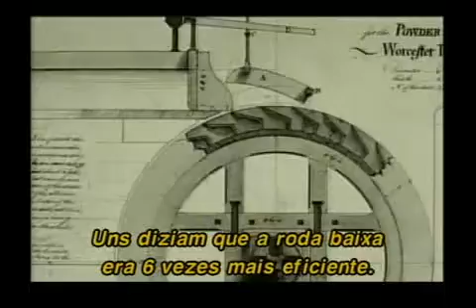In use since Roman times, the water wheel was still the main source of power, but was at the centre of an increasingly heated debate. There were two basic designs, the undershot and the overshot. Some contended that the undershot was 6 times more efficient than the overshot. Others insisted that the overshot was 10 times better.

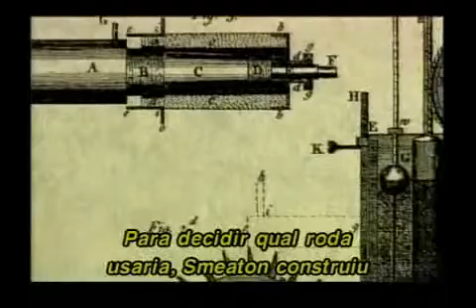In 1752, a maker of scientific instruments, John Smeaton, was foolhardy enough to try and settle the matter with science. At the age of 27, Smeaton was given a commission to build a watermill, a feat in itself since he'd never built one before. To work out which design he would use in his mill commission, Smeaton built a sophisticated wooden model. It allowed him to test how much power the undershot and the overshot wheel exerted in the same wooden frame using the same head of water.

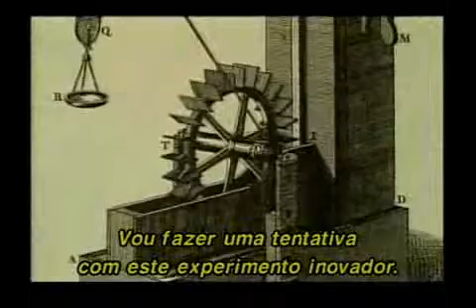I'm now going to have a go at this groundbreaking experiment. This one, of course, here's the undershot, and this is how it works. I open the reservoir, water comes out, and it gushes below the wheel, and it turns the paddles. Now, here's the overshot. Same thing, open the sluice, and the water gushes out of here, I should say, at the same rate of knots as out of that.

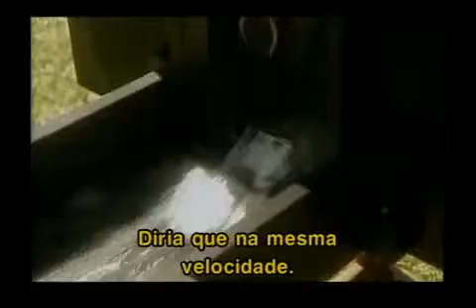The water power is the same for both wheels. What's interesting is that it's turned in different directions. So, which is the stronger? Well, we'll have a tug of war to find out. We can do this by connecting the two wheels with this rod here. And of course, the stronger wheel will prevail and will drag the weaker wheel in its direction. Let battle commence.

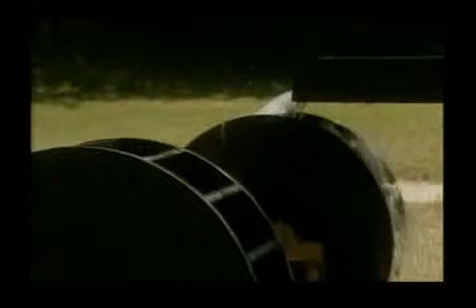The overshot is going the direction it should be going, and it's dragging the undershot with it. Quite clearly, the overshot wheel is the more powerful. There it is, the winner. Smeaton showed with his experiment that the overshot is approximately twice as efficient as the undershot. The key is gravity. The energy of the overshot is greater because it's falling from a height.

Not one to rush to hasty conclusions, Smeaton took 6 years to publish his findings. The detail of his analysis has left me a little baffled, but it amazed his peers. With his scientific test and analysis of the result, Smeaton offered a way to focus on the efficiency of machines that others could follow. Smeaton had really laid the foundations for the modern profession of civil engineering.

In the hands of another man, Richard Arkwright, the work revolution would take its next crucial step. Arkwright had a brand new machine powered by Smeaton's overshot water wheel. It was hidden away in a remote valley of the Pennines in Derbyshire, as if in a fortress. He didn't want anyone to see what he had in there. Arkwright's secret machine would transform the manufacture of a traditional cottage industry, unchanged for generations. Cotton spinning.

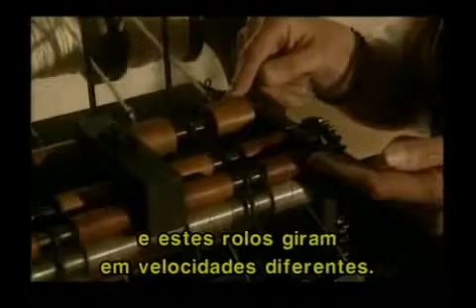Right. So we bring in this cotton at the back here, and these rollers, they're geared to go at separate speeds. The back one is going slower than the front one, and that bit that I was doing with my fingers on the great wheel is being done here. It's drafting the fibres out so that it's going thinner.

Okay, now I can actually get this in operation so we can see just what you mean. Get the wheel going, get my rhythm going. I can engage the mechanism like this, and off we go. So it's fantastic, it's all happening at once. Being drawn out, spun, and wound on. Earlier in the century, drafting rollers had been patented, but it was Arkwright's genius to realise the system and to make these drafting rollers work.

So obviously it's making more thread, more quickly, but also, as I understand it, the quality is better. In fact, it was so good and so easy to produce that Arkwright was able to think big. But imagine not just 4 bobbins loaded with thread, but 96, and powered not by hand, but by water wheel. And indeed, not just 96, but row upon row of these machines, floor upon floor. Such a dream entailed an altogether new kind of building. It was the cathedral of the Industrial Revolution, the factory.

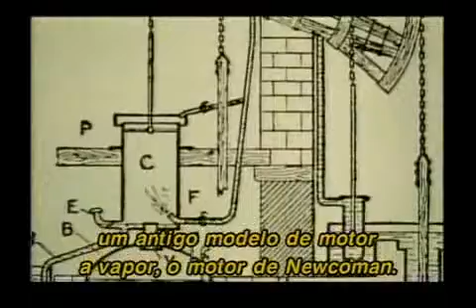James Watt grew up to be a maker of scientific instruments at Glasgow University. One day, he was asked to repair a model of an early steam engine, the Newcomen engine. The model had literally run out of steam.

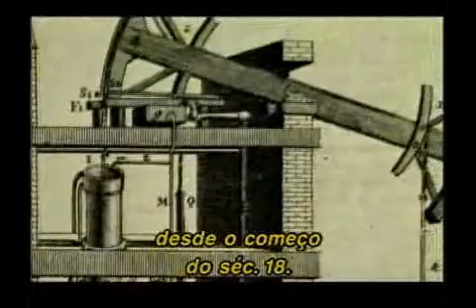The Newcomen engine had been in use since the beginning of the 18th century. It was mainly used for pumping water out of mines, but didn't work terribly well. The engine operated on the principle of a vacuum, created by condensing steam in a single cylinder. However, it consumed a huge amount of coal to produce not a lot of power.

Now, the problem with this engine is that steam had to be injected and condensed in the same cylinder. This means that for every stroke of the piston, the cylinder had to be heated and cooled, heated and cooled, heated and cooled. This made the machine very, very inefficient indeed.

Watt fixed the model, but wrestled with the problem of its inefficiency for over a year. Then he went for a walk on a Glasgow golf course. In 1765, as he walked across Glasgow Green, inspiration struck. As he was to write, I'd walked no further than the golf house before I had the whole thing arranged in my mind.

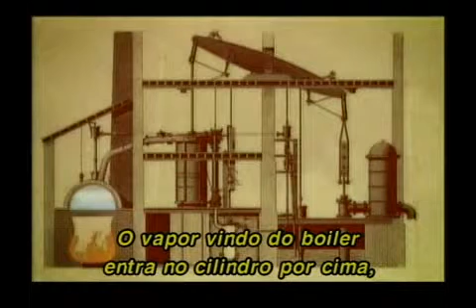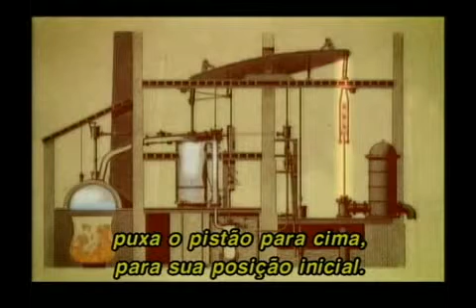Steam from the boiler enters the cylinder at the top, pushing down the piston inside. At the end of the stroke, the pressure in the cylinder is equalized, and the natural weight of the pump rod pulls the piston up towards its starting position. As it rises, a valve releases the steam into the bottom of the cylinder.

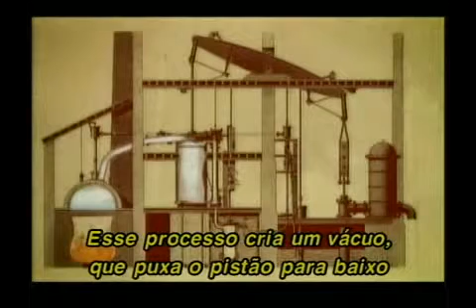On each downward stroke, this steam is drawn into the separate condenser, where it is condensed. This process creates a vacuum which pulls down the piston as the steam above pushes it down. This amazingly efficient use of steam means that the Watt engine consumes less than a third of the amount of coal used by the Newcomen engine. It's also twice as powerful.

The awesome power of this engine raised a ton of water with every stroke. That's nearly 4 million gallons a day. But Watt's engine was to become more than just an efficient super pump; it was to drive the transformation of every workplace in the country. But there was a problem.

Watt was a pessimist, a hypochondriac, prone to fits of despair, inactivity and depression. His low point came in 1773, when he concluded that there was nothing more foolish than inventing. And for once, his depression was justified, because after 8 years of toil on his steam engine, his partner went bankrupt. What he needed, of course, was a new partner, one with drive, resourcefulness, and a head for business.

Enter Matthew Boulton. Boulton was a dynamic Birmingham manufacturer who, when he met Watt, saw the designs for the steam engine and immediately realised its potential as a business venture. Boulton, with his ready cash, his craftsmen and his confidence, took on this great and new idea and he ran with it.

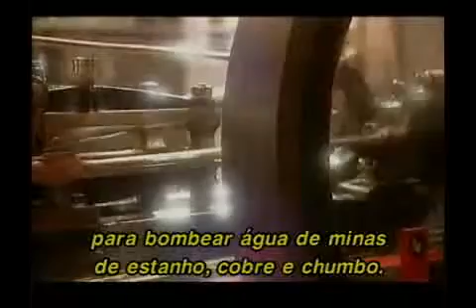Watt left Scotland and joined Boulton in Birmingham in 1774. In partnership, these two men were going to be, as you'll see, giants of the Industrial Revolution. Within 5 years, after improving their prototypes, they had captured the market in steam engines for pumping water out of tin, copper and lead mines. But Boulton had bigger ambitions.

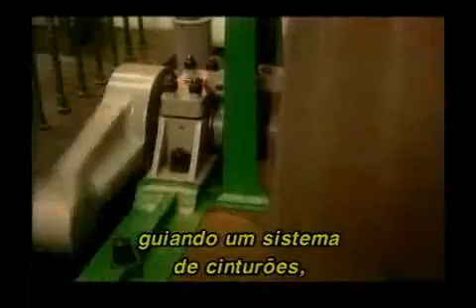Boulton realised that one small but highly significant alteration to the steam engine would make it much, much more useful. He urged Watt to devise a way of converting the up and down or reciprocating action of the engine into rotary action, so it worked rather like a super efficient, powerful and very reliable water wheel. With an arm attached to a crankshaft driving a system of belts, the steam engine could power not just one machine at a time, but a whole series of them.

Steam power was about to change work and the workplace, not just for the miner, but for the manufacturer, the iron foundry worker, the textile worker, the distiller, and even the potter. Steam was now big business, and the place it took off from was the Industrial Revolution's most happening city, Birmingham.

Even today, over 200 years after they met, you can still come across Boulton and Watt. I wonder if, when their partnership began, they realised they would create one of the first international corporate businesses, with not only factory but design, marketing and office workers too. But success brought with it mountains of paperwork.

At Boulton's home, Soho House, still standing today, Watt showed his business partner how he could improve the speed and efficiency of their office clerks. The lugubrious Watt created the forerunner of a key office tool we can't imagine doing without today, the photocopier. This amazing thing is it, one of Watt's copiers.

Now, the ink was very important. Had to use special ink. Ink mixed with sugar and a good dash of French brandy. Okay, now I transform what looks like a travelling writing desk into a printing press. Amazing. Well, now I'll make a copy of my letter.

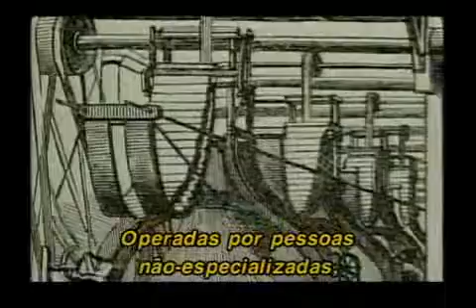Now, mechanisation had caught up with his craft. The new automatic power looms, driven by steam, would make the weaver redundant. Operated by unskilled attendants, the power looms were able to do the intricate work of the weaver much more quickly and cheaply. He simply couldn't compete.

Employers used the competition from power looms to drive down weavers' wages. And weavers, faced with dwindling prospects of employment, had to take any job they could get, no matter how low the wages. Anything to keep body and soul together. Now, faced with no support from the government, the weavers had to take direct action.

In the 1820s, industrial action broke out all over Britain's new textile districts. But the protest was in vain. Britain's weavers, facing starvation, would literally die out. 250,000 of them.

One loom in particular would not just revolutionise the weaver's world, but would set in motion today's technological revolution, the jacquard loom. A Frenchman, Joseph-Marie Jacquard, invented his loom in 1801 to weave fashionable, patterned fabrics. The ingenious thing was that the patterns could be woven automatically.

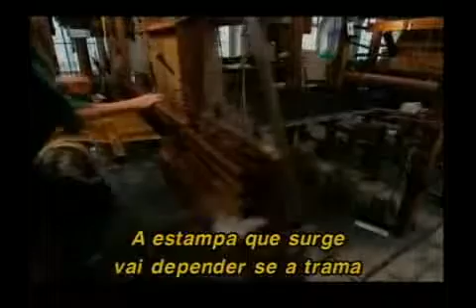A pattern is built up by passing the weft, a coloured thread which runs across the loom, through a space between the taut warp threads which run from the front of the loom to the back. The pattern which emerges depends on whether the weft passes above the warp threads or below them. To allow this, some warp threads are lifted while others stay in place.

I've come to Paradise Mill in Macclesfield to find out more from a weaver, Sarah Lees. How does the loom know which warp threads to lift, which to leave in place, and in which order? Well, that's all controlled by the jacquard on top, and it's punch cards which tell it which ones you want to leave or pick up.

I can see it's lots of cards, hundreds of cards with thousands of holes, but I can't quite make out from here how it works. Can you give me more detail? I've got a model to show you, which will make it all clearer, if you want to go and have a look. Can we see that? Yes, please. Yeah, certainly.

So it all depends on these cards here. These cards are presented to these spring-loaded needles. Can I have a touch of those? Certainly. Oh, yes, rather sharp. OK, here they are, the needles here, and those go into the holes. Yep, and those in turn are presented to these hooks. And so these hooks control the warp threads down below?

So if there's a hole in the card, the needle passes through it, and the hook is left over the beam, which lifts up. So if there's a hole, the warp thread would be lifted. Whereas if there's a solid, the hook is pushed off the beam, the warp thread stays down. If I treadle it, you can see different ones picked up every time.

Incredible. So these cards are basically the code for the pattern on the fabric. Yes. It seems to be very, very pioneering. It was. It not only controlled the jacquard, but later on it has led to the first computer programming.